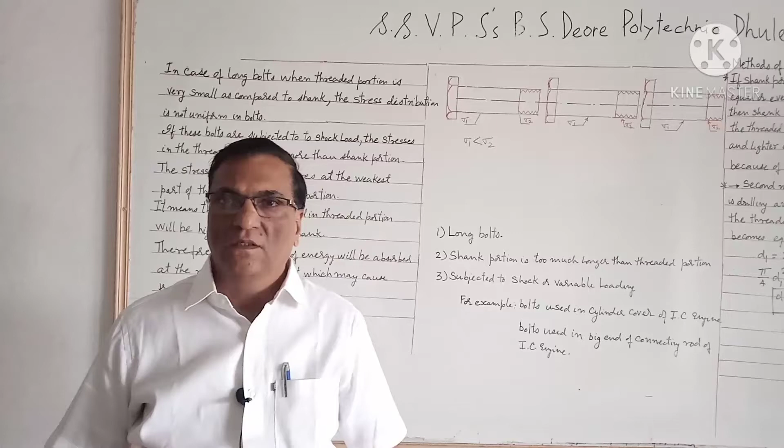Good morning, students. In this session, we will study the meaning of bolts of uniform strength and how to make bolts of uniform strength.

First, when are bolts of uniform strength needed? We use long bolts where the shank portion is much longer than the threaded portion. The shank is the unthreaded portion, and this is the threaded portion. This applies if the length of the unthreaded portion is more than the threaded portion.

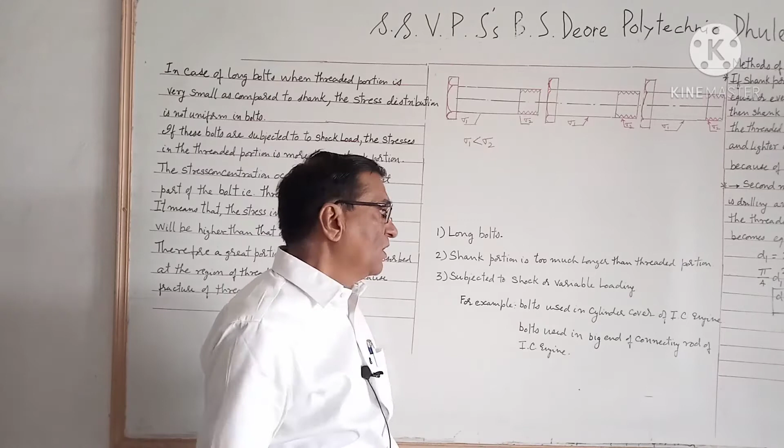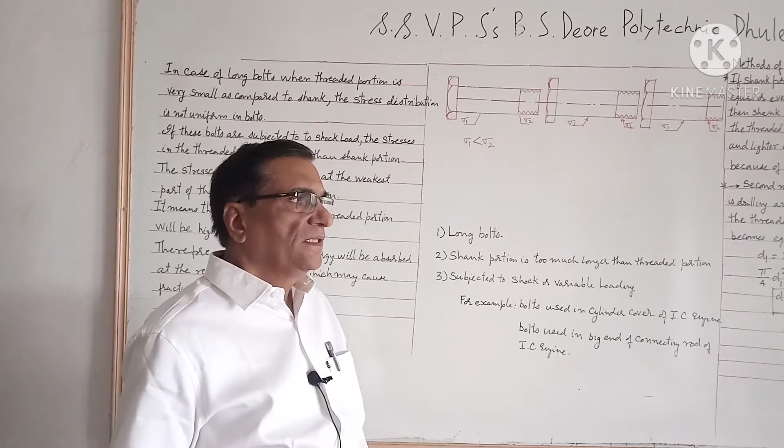Third, these long bolts are subjected to variable or shock loading, as in the case of bolts used in cylinder covers of IC engines and bolts used in the big end of connecting rods of IC engines. In that case, it is needed to make the bolts of uniform strength.

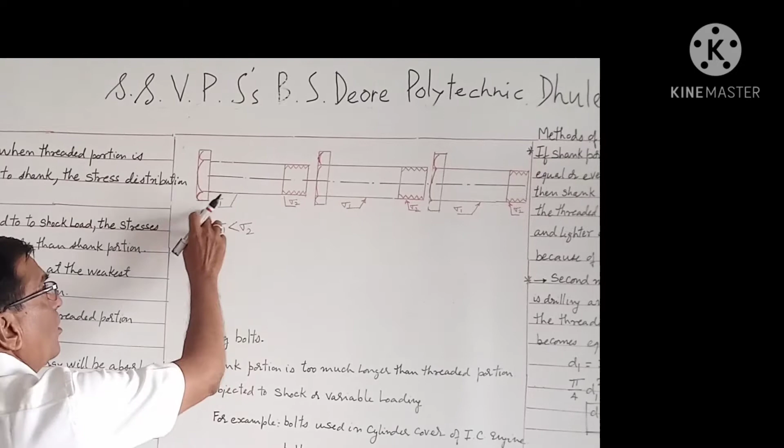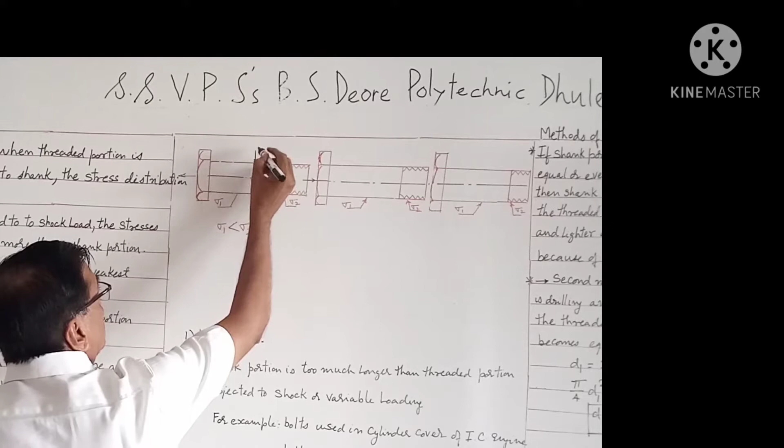Take the first case, when these long bolts are subjected to variable loading. First case: when the diameter of the shank is equal to the outside diameter. In that case, the energy absorbed by the threaded portion will be more than the shank portion. In short, the stresses in the threaded portion will be larger than the shank portion.

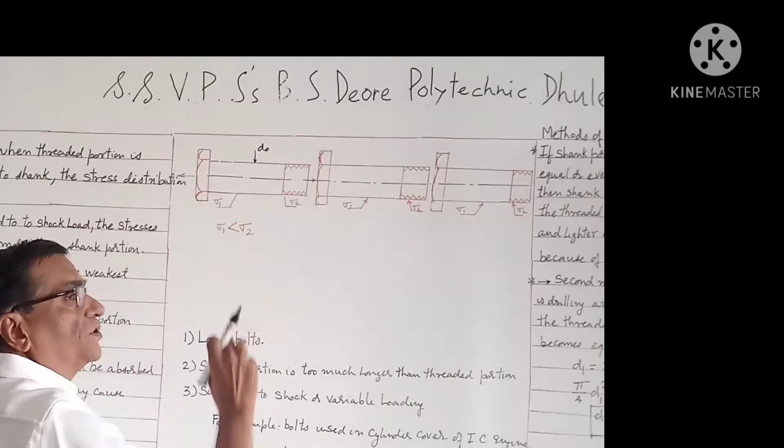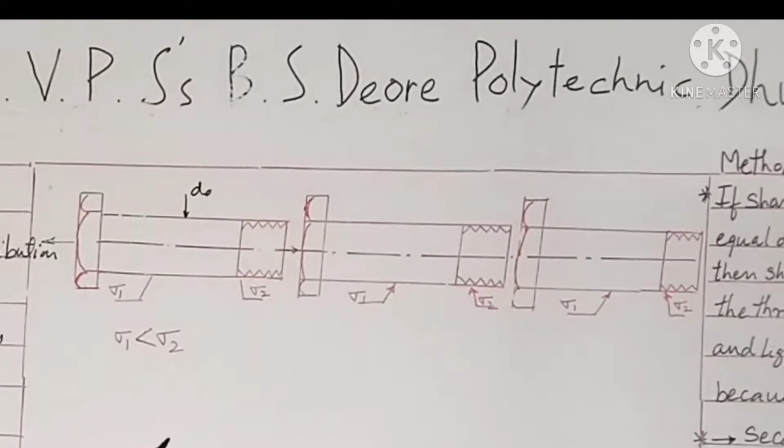Suppose sigma 1 is the stress in the shank portion and sigma 2 is the stress in the threaded portion. In that case, sigma 2 will be larger than sigma 1, or sigma 1 will be lesser than sigma 2.

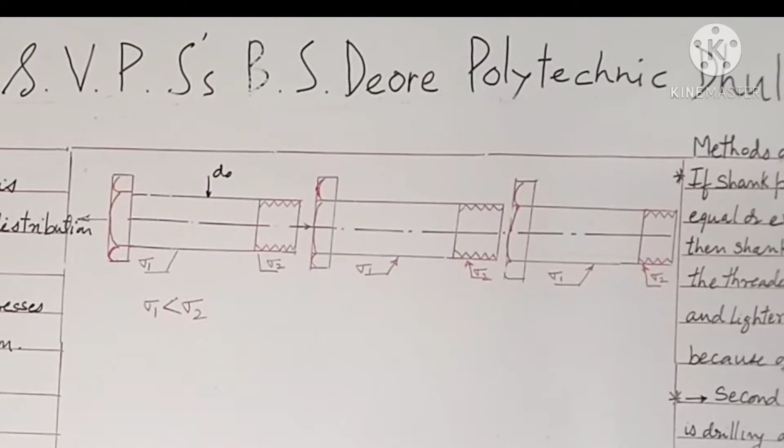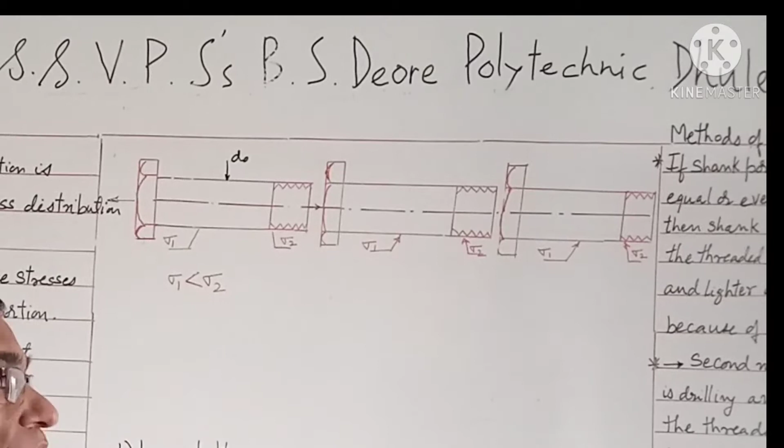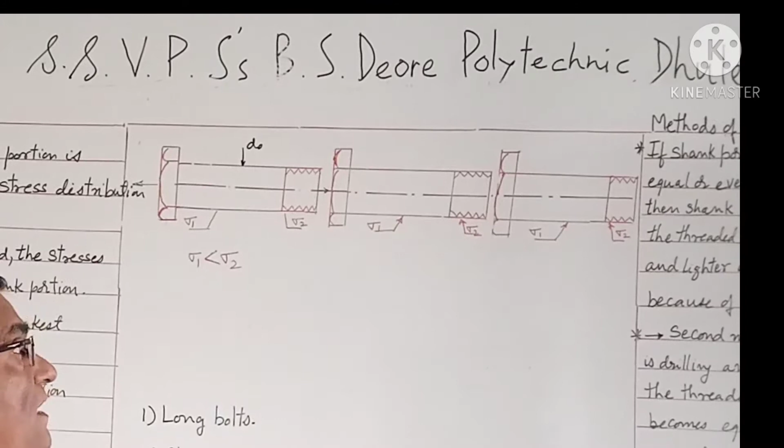In order to make the bolts of uniform strength, we have to make sigma 1 equal to sigma 2. There are two methods of making sigma 1 equal to sigma 2. First, by undercutting the shank portion, making the diameter of the shank portion equal to the core diameter, so that sigma 1 equals sigma 2, because the area of the shank portion becomes equal.

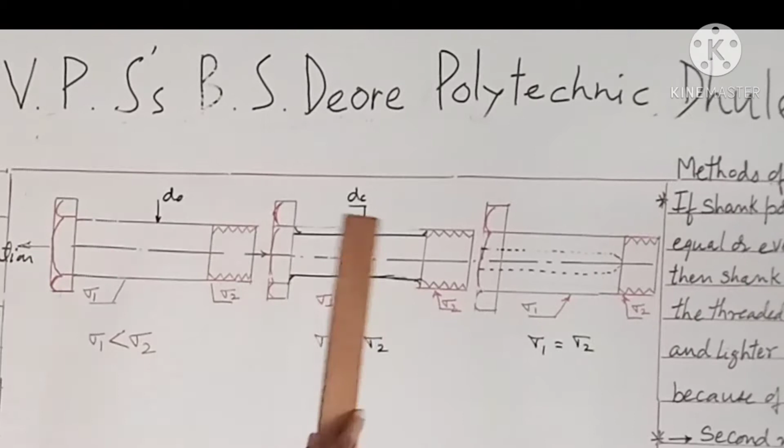In order to make sigma 1 equal to sigma 2, we undercut the shank portion. We reduce the diameter of the shank portion so that the diameter of the shank becomes equal to DC.

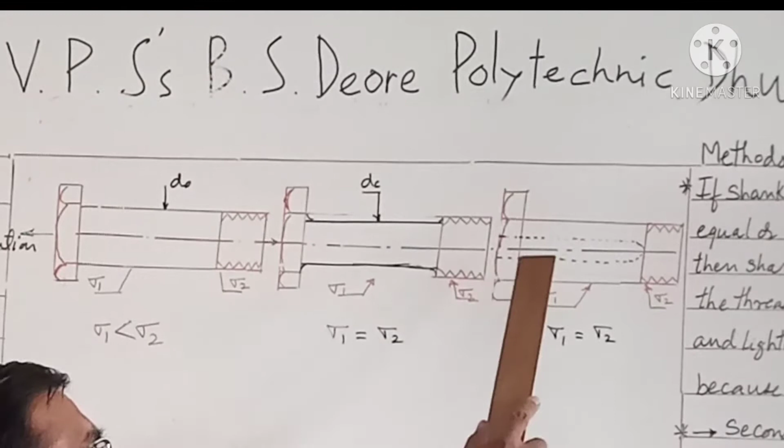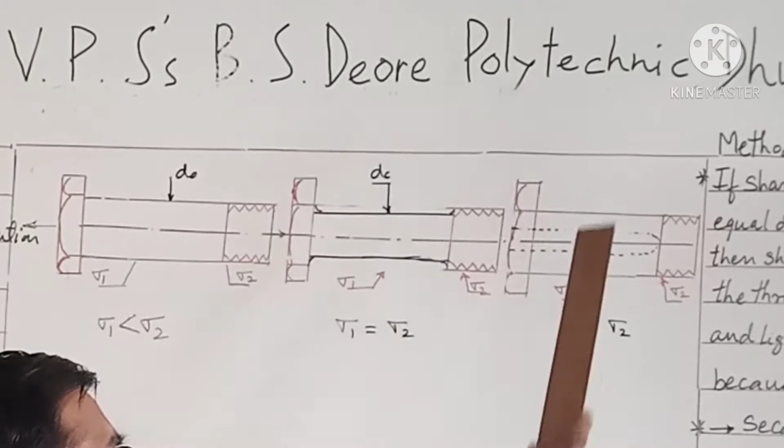Or second method: drill a central hole at the top of the head up to the unthreaded portion, or up to the thread in the unthreaded portion, so that the area at section x becomes equal to the area at x1.

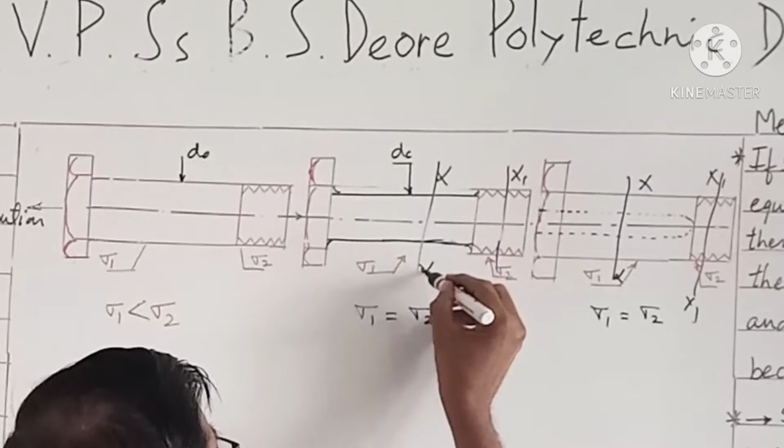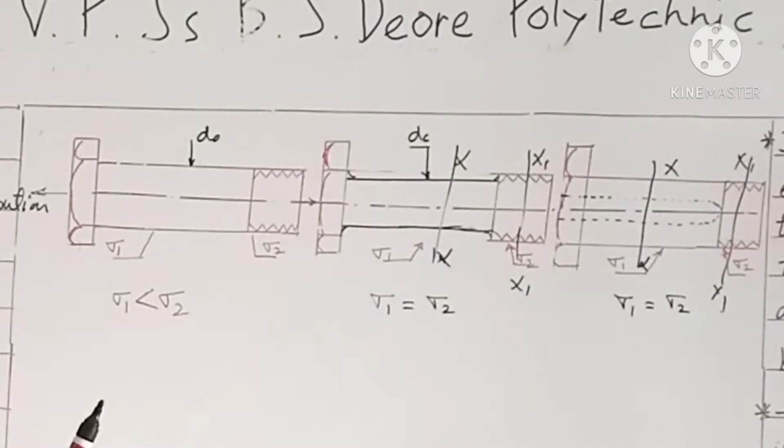This makes the stresses in the shank portion equal to the stresses in the threaded portion. So this increases the load carrying capacity of the bolts.

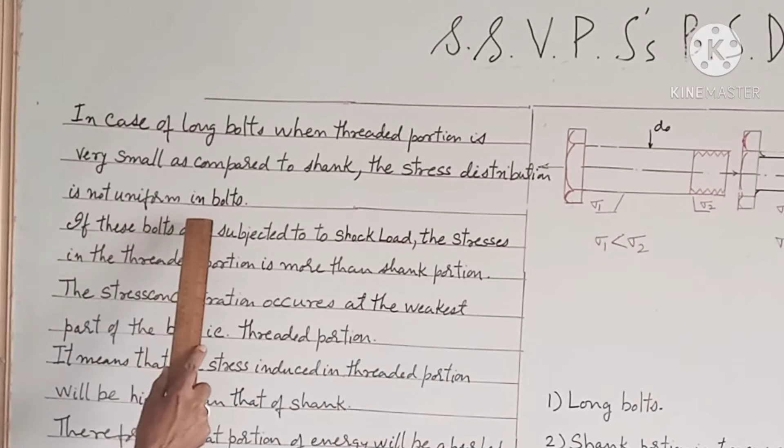Now we will study in detail. In the case of long bolts, when the threaded portion is very small as compared to the shank or unthreaded portion, the stress distribution is not uniform in the bolts.

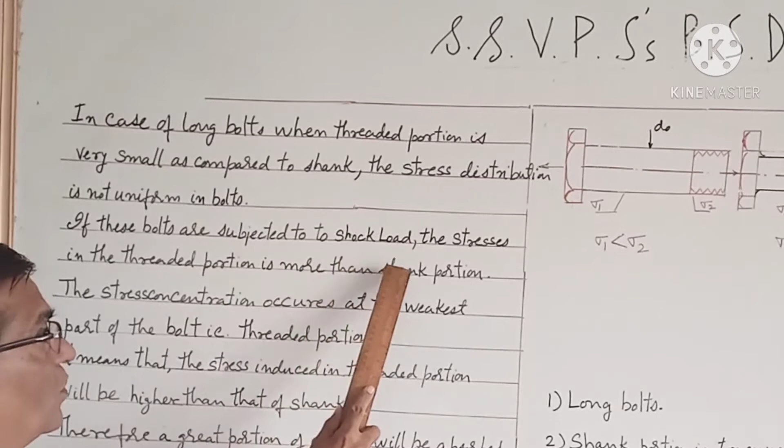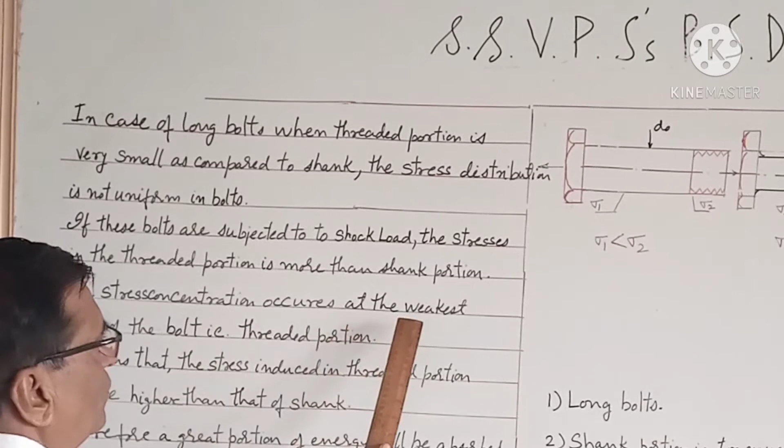If these bolts are subjected to shock load, the stress in the threaded portion is more than the shank portion, meaning sigma 2 is greater than sigma 1. Thus, stress concentration occurs at the weakest part of the bolt, the threaded portion, where the value of stresses increases.

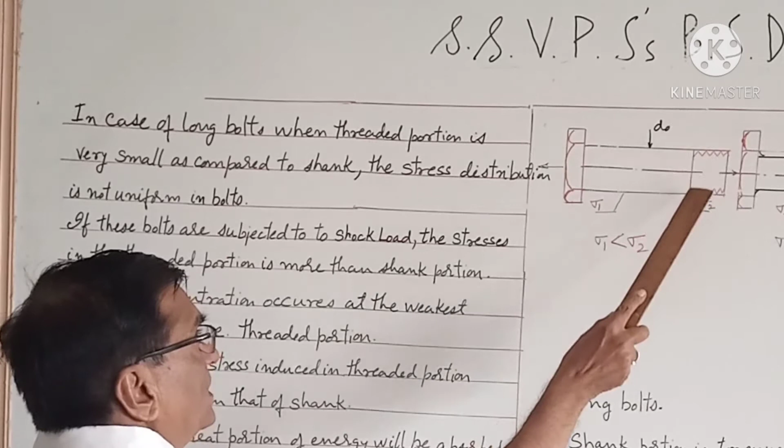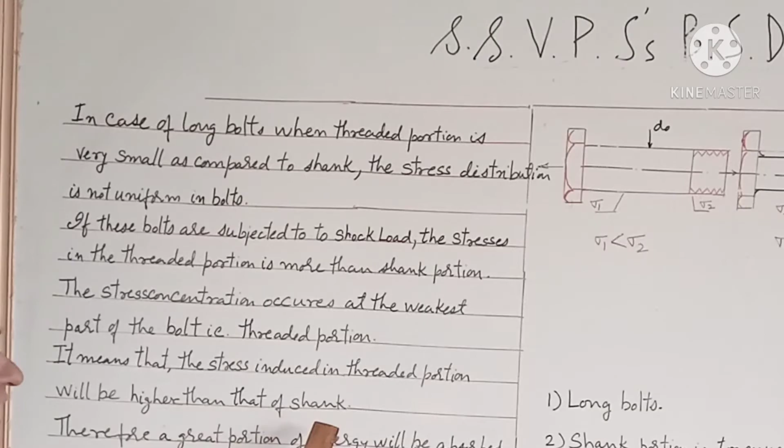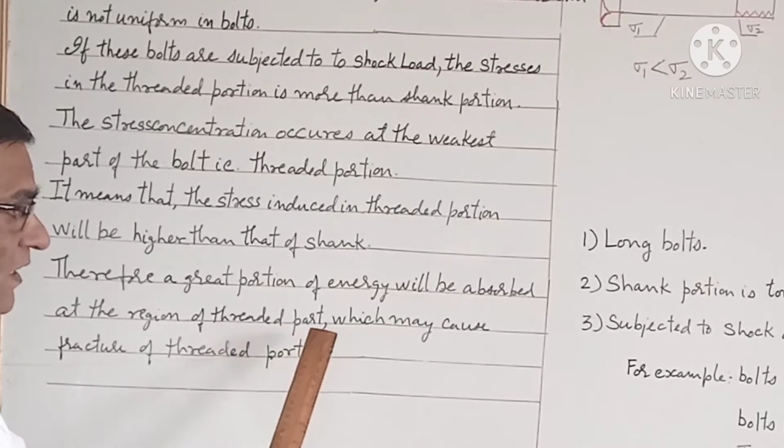This means the stresses induced in the threaded portion will be higher than those in the shank portion. Therefore, a great portion of energy will be absorbed at the threaded part, which may cause fracture there, as greater energy is absorbed and there are chances of failure from this threaded portion.

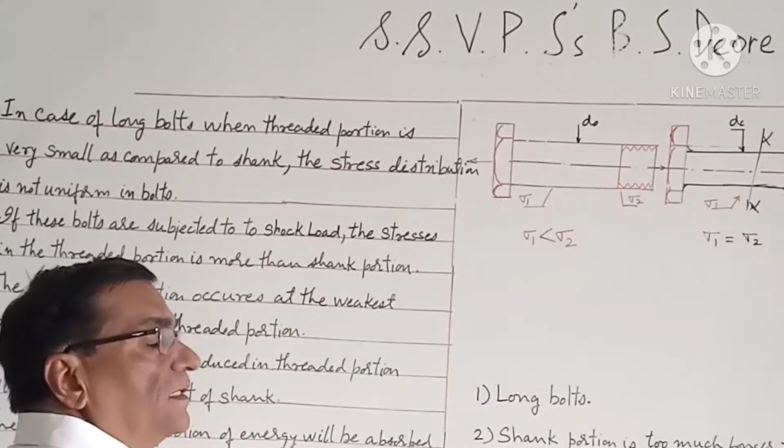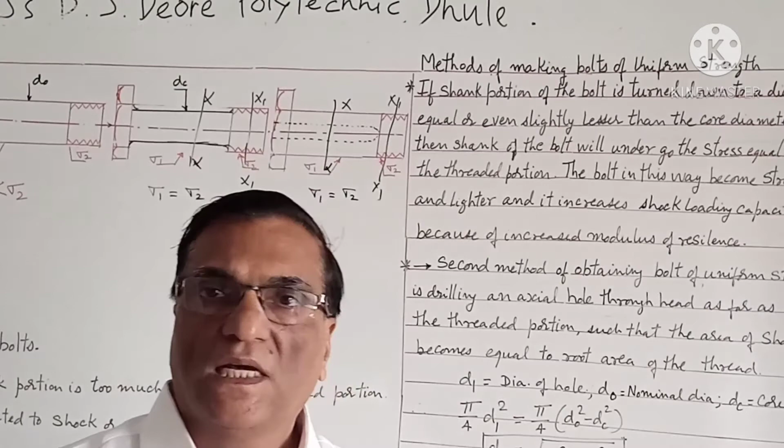Now we will study how to make the bolt of uniform strength. There are two methods of making bolts of uniform strength. The first method: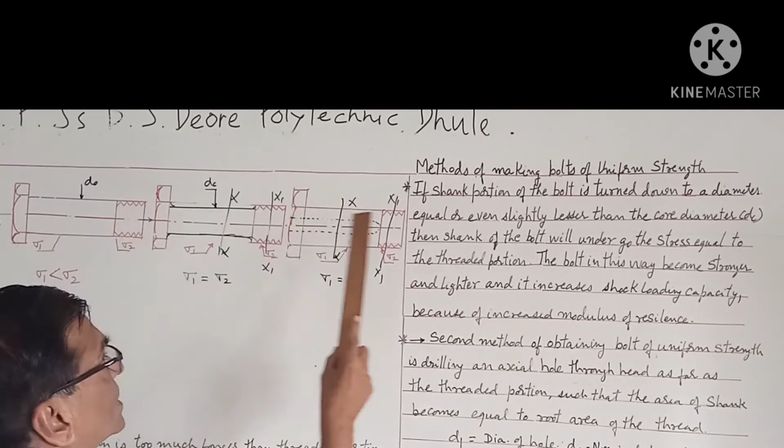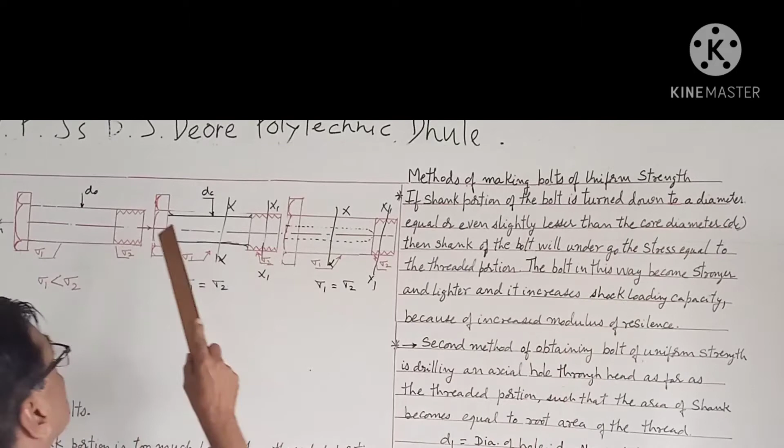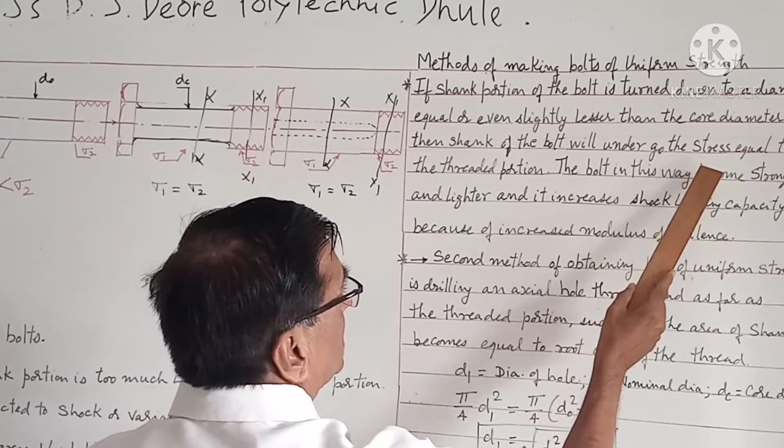If the shank portion of the bolt is turned down to a diameter equal to or even slightly lesser than the core diameter—this diameter DO reduced to core diameter DC or less—then the shank of the bolt will undergo stresses equal to the threaded portion. The bolt in this way becomes stronger and lighter, and it increases the shock loading capacity because of increased modulus of resilience.

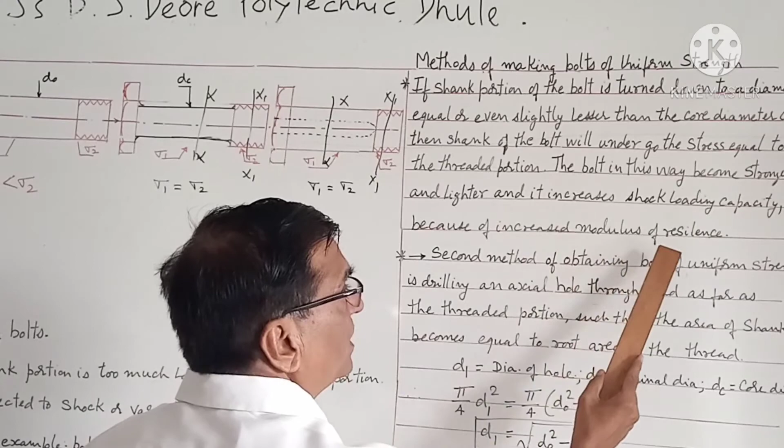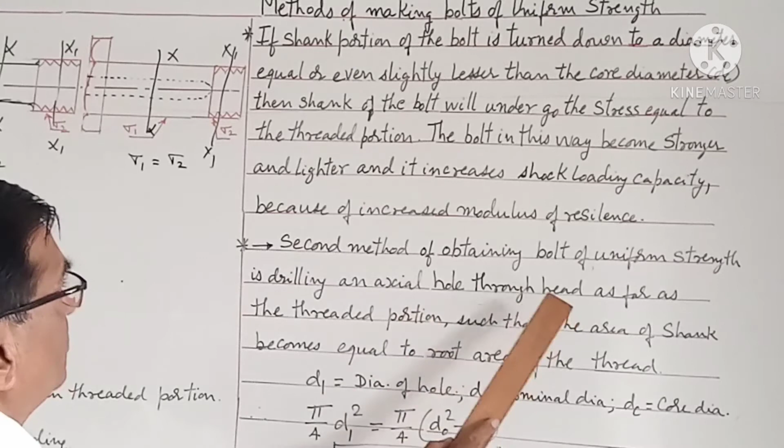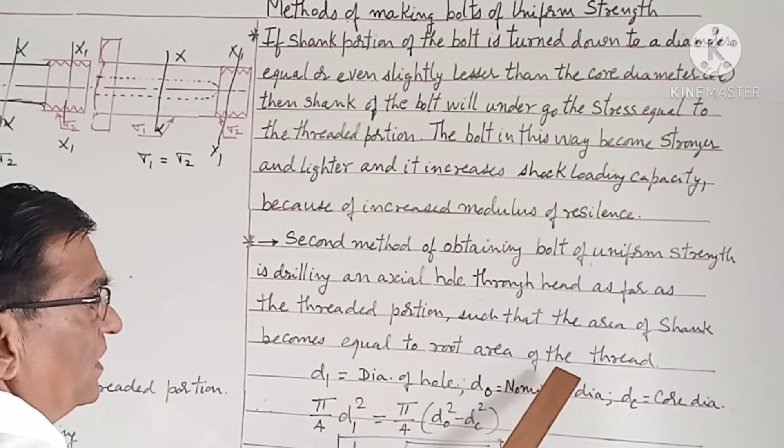Now the second method of obtaining a bolt of uniform strength is drilling an axial hole through the head, as far as the threaded portion, such that the area of the shank becomes equal to the root area of the thread, meaning the area at the threaded portion becomes equal to the area at the shank portion.

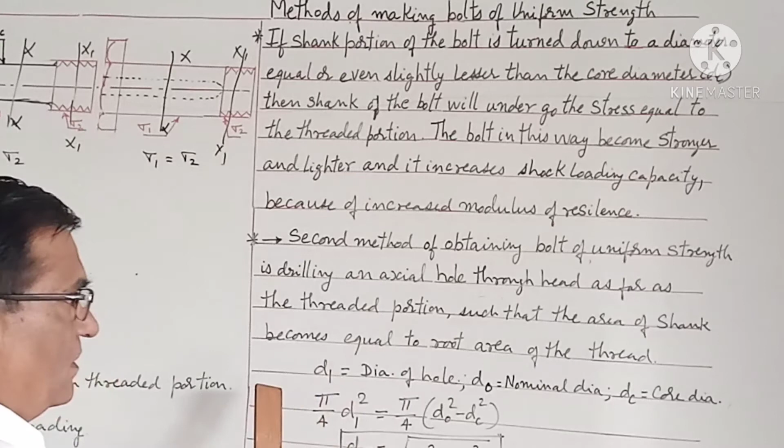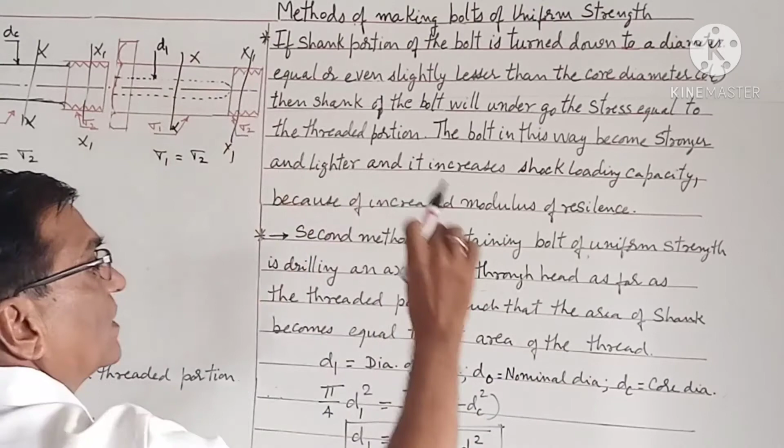Suppose D1 is the diameter of the hole. DO is the outside diameter or nominal diameter, and DC is the core diameter.

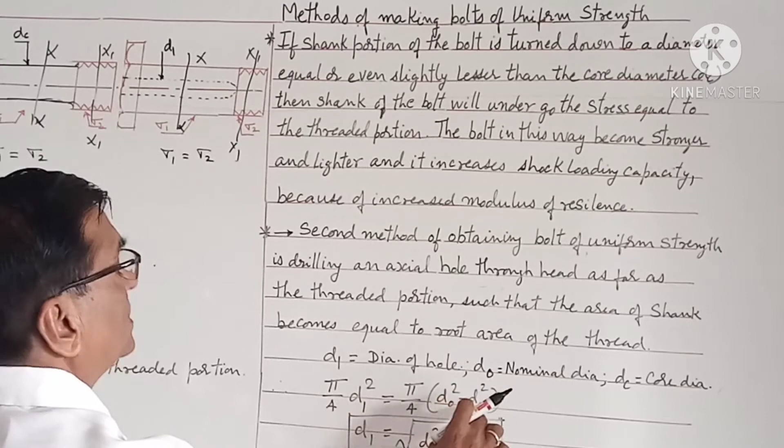Then the area at this section, the shank section, is equal to pi by 4 D1 square, which equals the area here, DO square minus DC square. After drilling the hole, the area will be pi by 4 times the bracket DO square minus DC square.

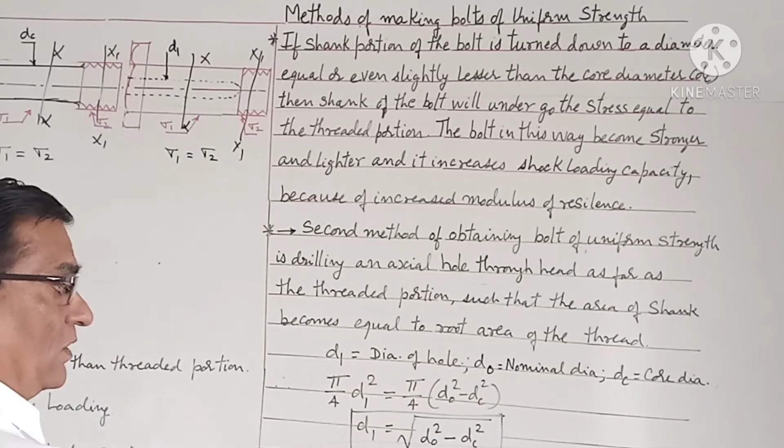So we can determine the diameter of the hole to make a bolt of uniform strength. It will be equal to the square root of DO square minus DC square.

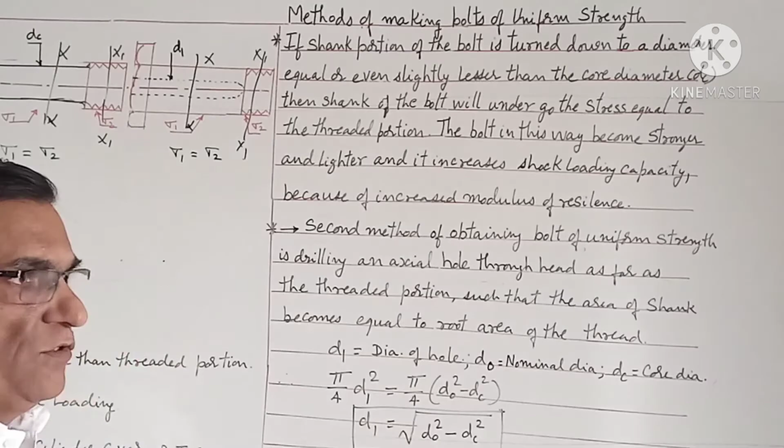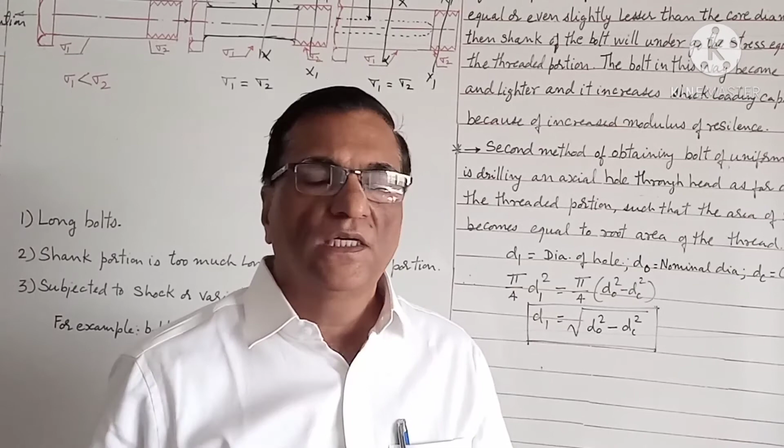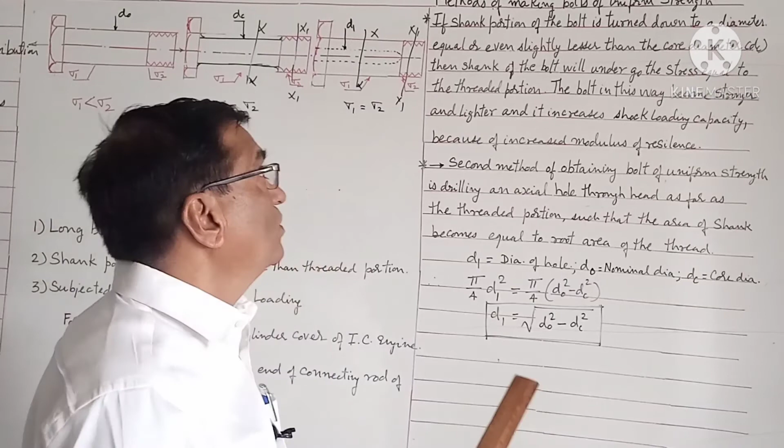So this is all about bolts of uniform strength: where these bolts are used, why it is necessary to make the bolt of uniform strength because of different stress distribution that weakens the thread, and so in order to increase the strength or resilience of the bolt, we make the bolt of uniform strength.